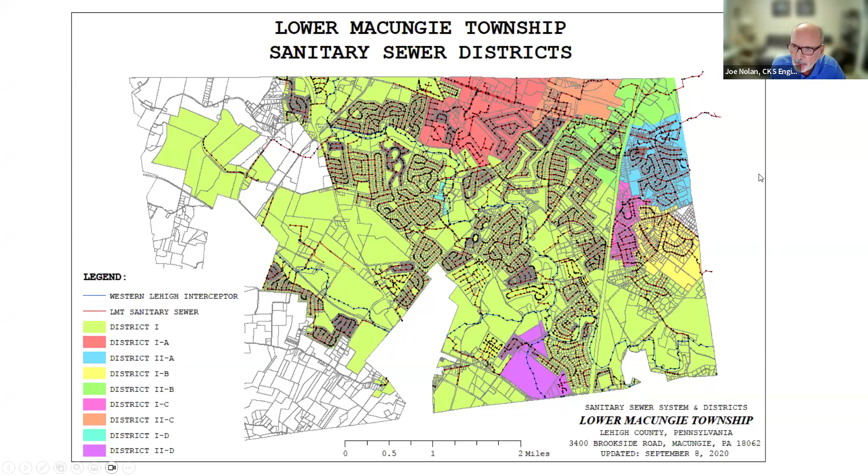Okay, I'm going to go over my preliminary estimate for the ability to provide public sewers to the East Texas Road area. I've been working with Zach on this for quite a few months now, and this will be my initial assessment. This is a map showing all the sewer districts in the township. You can see over here in this corner where my cursor is, there's an area that's not designated to be in a sewer area. That's because there's no sewers there.

The initial phase, which Bruce talked about, is phase 1, which are the 14 houses along East Texas Road, and that's what this presentation will focus on. Phase 2, we're looking at separately, but phase 1 is the one with the most priority.

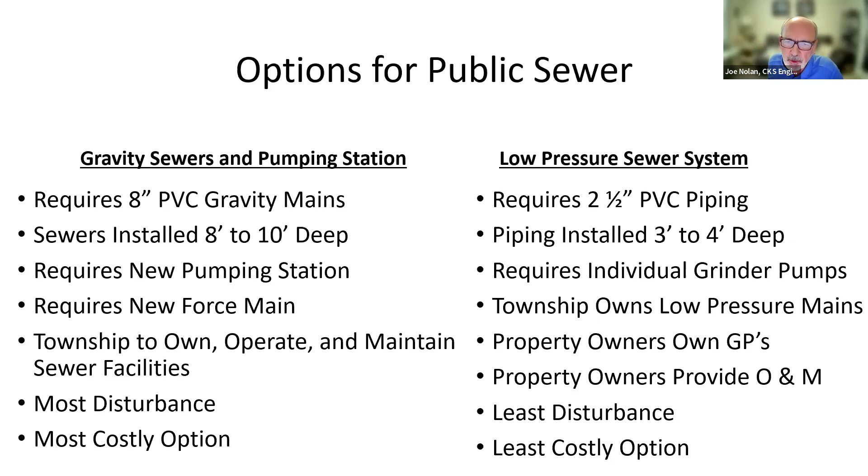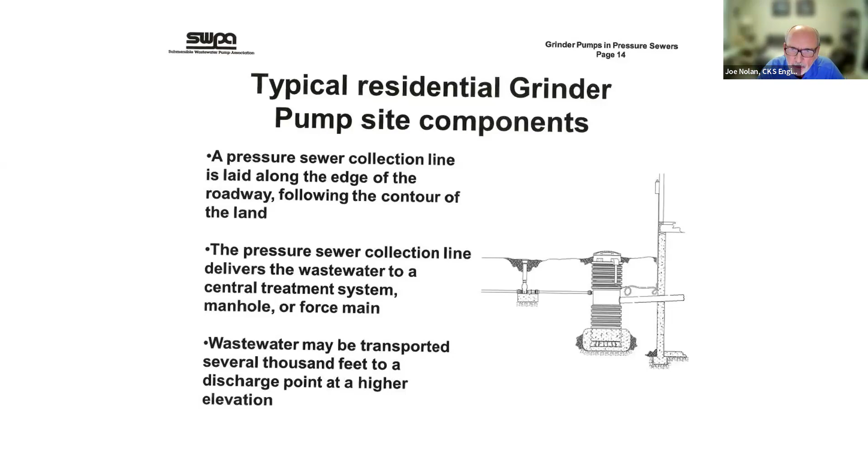To give you an idea of what this would look like, you see here a sketch of a house wall, and you see a drawing of a grinder pump. Flow would come from the existing sewer lateral in the house into the grinder pump. There'd be a pump within that facility, which would then grind the matter which is entered into the pump station, and that would be pumped into a low pressure force main, which would connect to the low pressure force main that the township would construct in the street.

This is a little more detail on that same configuration, but this gives you more indication of the components that are involved in the pump station. It gives you a cut view of what it would look like inside, and all of the features that are required in conjunction with installing a grinder pump on each resident's property.

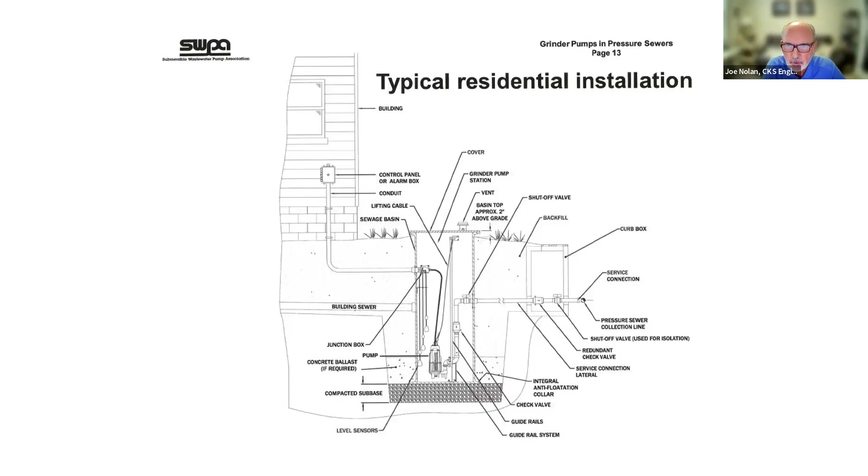This is an overview of the area that we looked at in the aerial that I talked about. You can see here is the municipal boundary. Phase 1, which is what we're talking about tonight, are the 14 properties along East Texas Road. Phase 2, which we'll look at in the future, is the orange colored areas on the map.

We would construct a low pressure main running from the end of East Texas, where my cursor is now, and we install a section down at Pressler as well, just to pick up those couple of properties there. This would connect to the existing manhole at the intersection of Fish Hatchery and East Texas, and from there would flow by gravity into the township's current wastewater system.

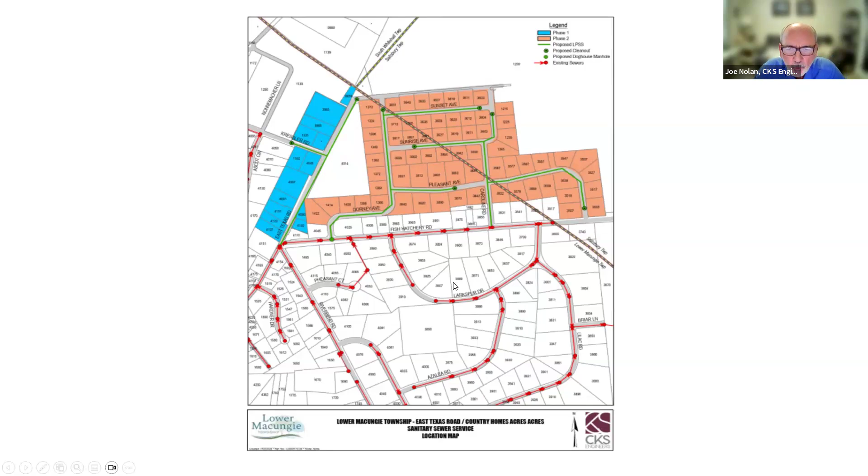Based on construction costs from recently constructed projects and all of the specific components required to construct the system, we're talking about a construction cost of approximately $265,000. You add in engineering, construction, and some contingencies, and you're talking about $318,000 to construct the main in the street and the 14 laterals with connections that would run from the main to the property line, with a shutoff valve at that point. That's what the township would initially construct.

Now, the cost implications of this would need to be considered. There are different options for how it would be funded. The township would, in all probability, take on the burden of financing the initial construction to get the project completed. Then the township would have the option of recouping that cost through various methods. One would be adding it to a tapping fee for that particular run of 14 units, or the other would be to prepare an assessment for each property owner, assessed against the property, and then the homeowner would be responsible for the additional costs to hook up the sewers.

So phase one, we have one in trouble for sure. Phase two, at least 2, I think 3. 2 or 3. The problem with phase two is really - and the reason I wanted to look at it, I know we're going to have these probably pop up over time, over the next say 10 to 20 years - but in phase two the constraint there is that they are smaller lots.

I've already had a couple instances where we've just had to use what's called best technical guidance. So when you put in a new septic system, you're kind of not adhering to the regs because you don't have a choice. DEP still has to look at it through the approval process, but obviously if there are other alternatives you try to avoid that - in these cases you can't. So a lot of times we're reusing drain fields and that sort of thing. Frowned upon, but no other option.

Okay, so 2 questions for Bruce. Number 1, if we go - and I think we probably should go with the when-you-sell-or-when-you-fail option -

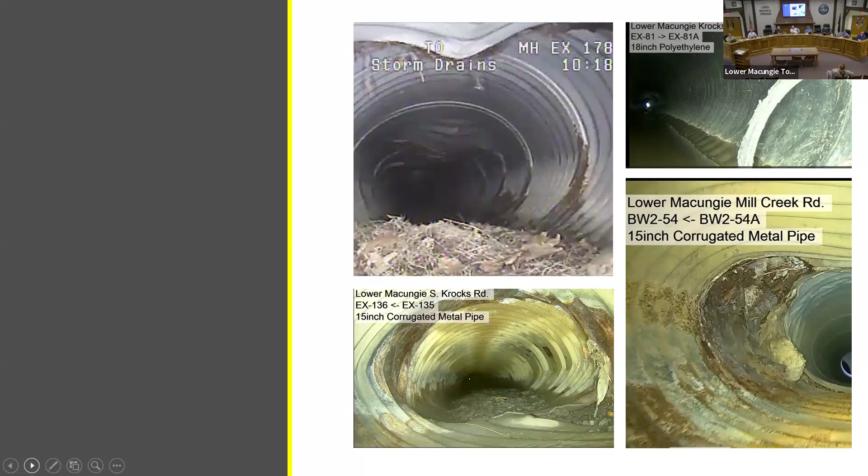My demonstration piece of liner is back in the office. For those that aren't familiar- and I know you gentlemen are familiar with the sewer work- they basically put in a resin type sleeve that they pull through the pipe, then use a heat treatment on it, and you have a solid plastic pipe good for 50 to 75 years. The thing to note with that type of process: we can't let the pipe go to the point where it doesn't have bottoms.

It becomes elliptical and moves.

So we went and said, okay, what can we do, and what's the appropriate time frame for us to look at this thing? We budgeted last year 350,000 to start to look at stormwater.

We weren't quite ready. We went back and identified 31,000 linear feet through various neighborhoods of corrugated metal pipe. We took all those areas with Zach and Brian's team and started to figure out a game plan on how we can both video that and then address it.

So we videoed last year 31,000 feet of pipe. We've reviewed almost 20,000 feet of it — actually almost 23,000. And of course, what we're finding is what's to be expected.

You'll see on the screen we grabbed some screen grabs of what our facilities look like throughout the township. So Mill Creek Road, South Krocks on the bottom left, another picture of Krocks on the top right — you're seeing pipes start to rust away, all the sediment that's in there, things of that nature.

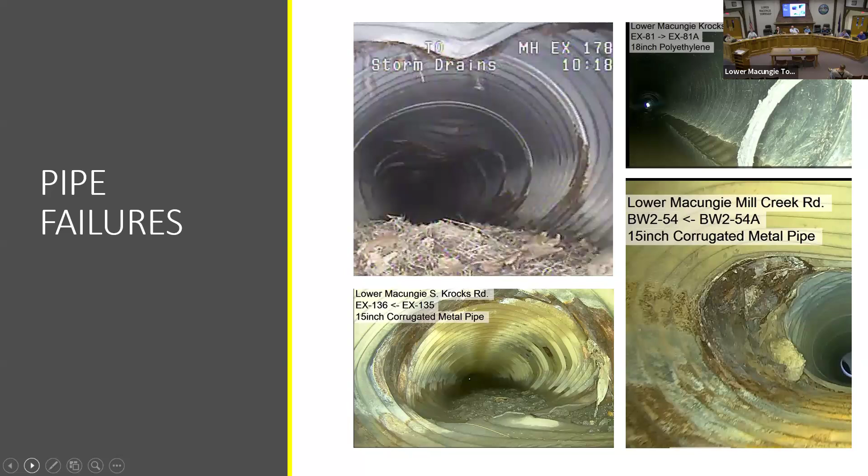So, you got any more pictures in there, Nate? And so you'll see that pipe on the bottom — there's no bottom left in it, it's rusted away. And then some of the other places you see: Southridge, up on the right is Aster.

So there's varying degrees. Most of this piping is in those older neighborhoods: Shepherd Hills, Winding Brook, Ancient Oaks, the South area, over right off of Lower Country Road, Hidden Valley Farms, those places, and then various cross pipes.

So we've really tried to, and we found more corrugated metal pipe than what we thought as we explored those maps that we had in the township for a while — we've actually found more than what was on the map.

So we're building the data set, we're building our file. We have a course of action now to start to address certain pipe.

I think just like sewer, we need to continue to video monitor where we are. So get through this pipe, budget in our stormwater line item like we have for maintenance repair, but get an ongoing program where we come back every so many years, do video, and have the engineer review it to see if we're still on track with better or worse.

I'd note when we looked at the video last year with Brian's team, we have around 7.2 million worth of repairs or process if we would go line everything right now at this instant. We did submit for a grant in excess of about 2.5 million. We were denied, of course, by the state.

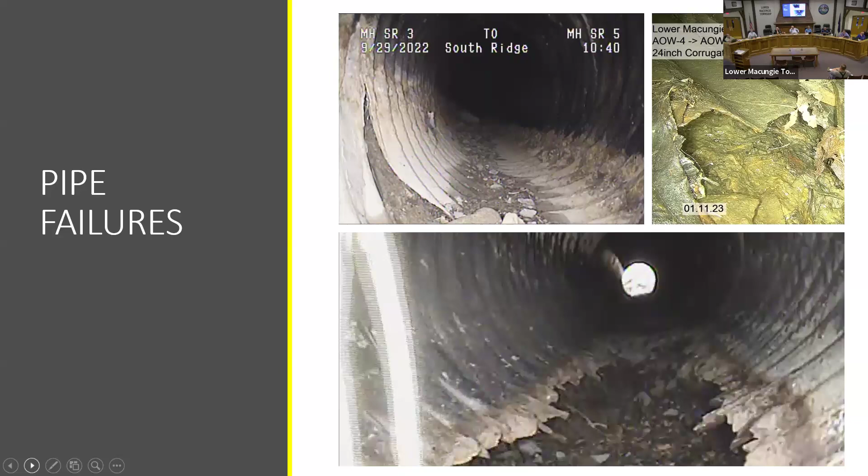I think we are. I think this is pretty telling, and there's your last slide. So that is showing, and part of our maintenance program, what we'd like to do in areas, have a flushing program.

We may have to get one of the companies that we dealt with, like to video, that can come in and flush. That's a little more excessive than what we can do, as you see the rocks on the bottom — for sewer jet truck or things of that nature, a little more specialty there.

So that's one of the other things we would look at: videoing, pipe maintenance with debris removal, and then potential lining, preferably before we have to dig and replace.

So some of those pipes come from the street and discharge between two neighbors' houses. They'll discharge towards a conveyance facility, like the one on Winding Brook off of Princeton. We just did the MS4 work where one of those pipes outlets. So they do run in areas that the township doesn't control.

Making sure residents are taken care of when we have to go through easements is always difficult. People may have put things over easements back in the day, like fences or sheds, or they don't like the color of grass the township plants or replants as we go through. That's always difficult, and it's something I've experienced for 10 years of my career with their dissatisfaction.

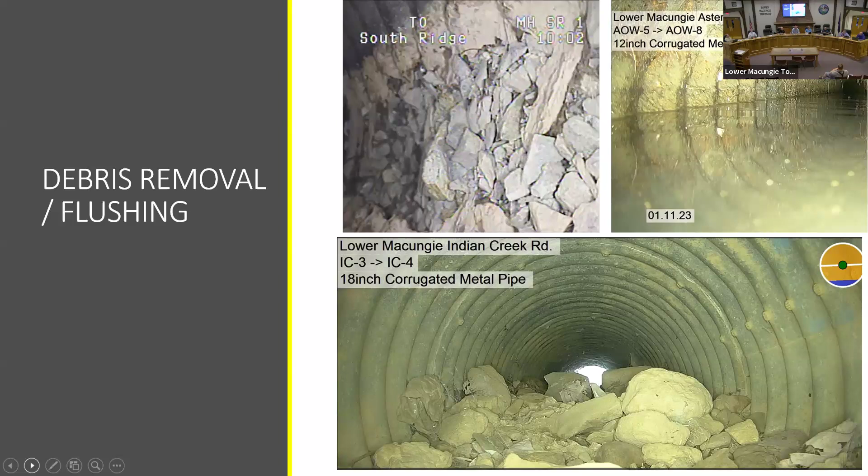So here's some pipes, there's some video. Hopefully we're headed in the right direction. I'm going to include that further for budget stuff, but any questions or things we can do, or even a more detailed presentation we can come back with and give you a map with certain areas identifying those repairs. We can get that for you.

All right, questions from the board? One of my concerns is that we do this on pipes that are too far gone.

Yeah, well, go ahead Brian. So what we're trying to identify is any issues we see with these respective storm sewer pipes in the older neighborhoods. There's no doubt that, as at least one of the photos showed, some of the pipes are beyond repair, in terms of you can't line them, you're going to have to replace them. So we're going through and identifying ones that could be lined and others that just have to be replaced. Bruce doesn't give himself enough credit.

This whole idea was spurred on because, as we've discussed with the township, we're changing the way the road program has been done and transitioning to more of a mill and overlay program. What we found is that many of these older roads have gotten other surface treatments for years and realistically should be redone, legitimately. To Bruce's credit, this coincided with some other conversations about other pipes in the township. He said, wait a minute, if we're getting about a 40 to 50-year lifespan out of a CMP, I'm pretty sure a lot of the older developments have CMP pipe.

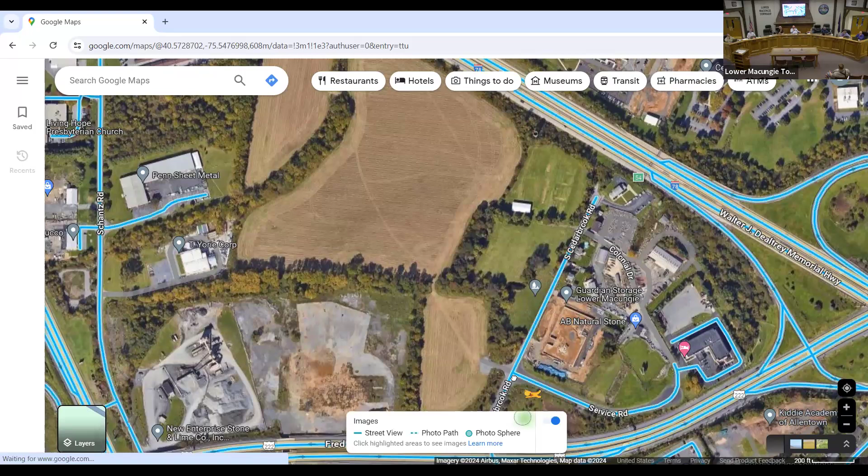So they've suggested that the township consider a turnback of the road. Turnback means the state gives that roadway back to the township. When they give that back to the township, it's called turnback. Just like liquid fuels, they give an amount instead, for turnback dollars. They would measure the roadway - there's a set amount per mile of turnback that they would give to the township, separate from liquid fuels, but like liquid fuels that we would receive.

As we were approached by the developer about our thoughts on the service road, or South Cedar Brook, Brian and his group and our inspector Matt met the developer out there and did a field walk of the roadway. As you do turnback, you can have PennDOT pay for repairs, as I understand it, or you can request that repairs are made to the roadway. So we walked that with the developer, who may have some obligation of making that meet our appropriateness of turnback or acceptance for the road.

We identified some potential under drain work, milling and paving full width, and putting some type of turnaround for township plow trucks at the end, either a hammerhead or something similar. Brian's come up with a little sketch too, to include some core boring areas, to make sure we have subsurface of the roadway accounted for and don't have to ask for anything else.